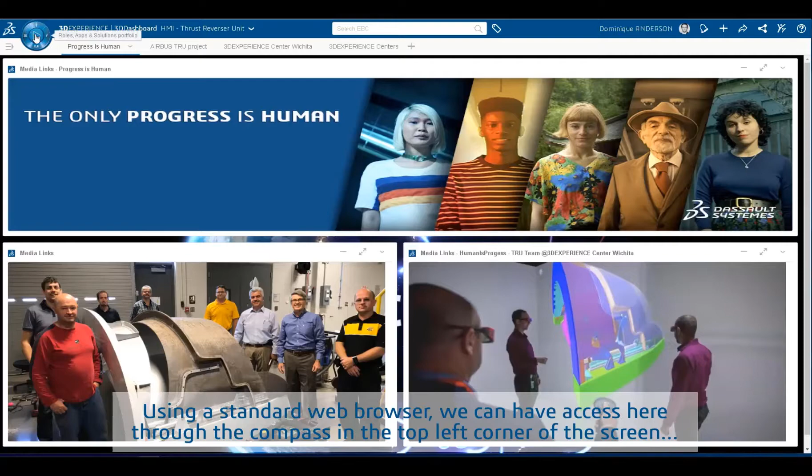Using a standard web browser, we have access here through the compass in the top left corner of the screen to the roles that are assigned to me, or for any individual in the company, and for all aspects of their business, from engineering to production, as you might know, but also including legal, general and administration, human resources, sales and marketing. For each role, there are a set of applications that are available. Those applications may be from Dassault Systèmes, from third-party software, or developed in-house.

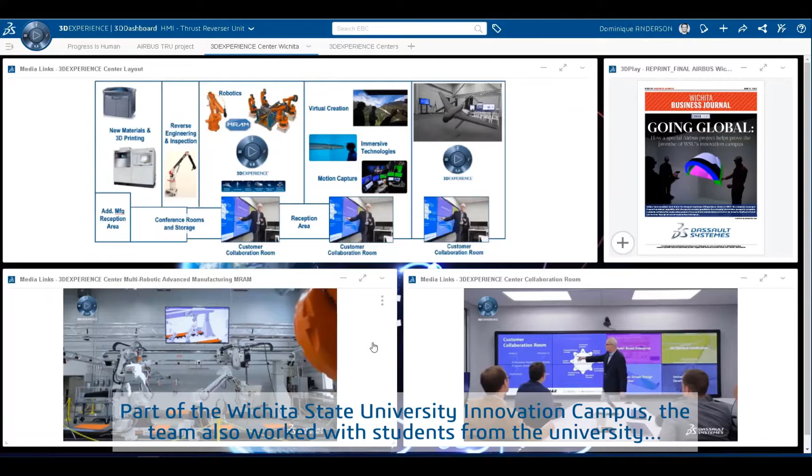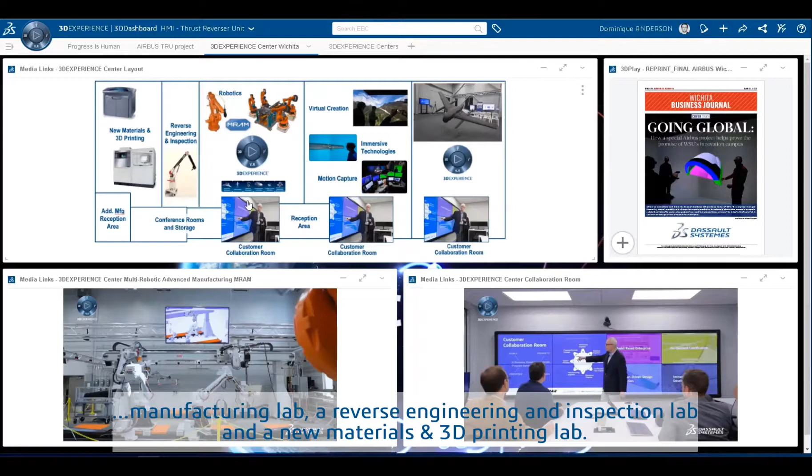They came together on the 3D Experience platform and in a unique facility called 3D Experience Center, located in Wichita, Kansas. Part of the Wichita State University Innovation Campus, the team also worked with students from the university, as well as with experts from the National Institute for Aviation Research, NIAR, to develop new working methods leveraging the various labs available, including the Immersive Technologies Lab, a multi-robotic advanced manufacturing lab, a reverse engineering and inspection lab, and a new materials and 3D printing lab. Extremely pragmatic in approach, these new methods are not idealizations, but can be taken back into your production environment.

The 3D Experience Centers are part of a global network we are building with universities, authorities, and industrial partners. As you see here, the Wichita Center is live. Centers in Seattle and Toulouse are work in progress. Various centers are also active in India and across Asia.

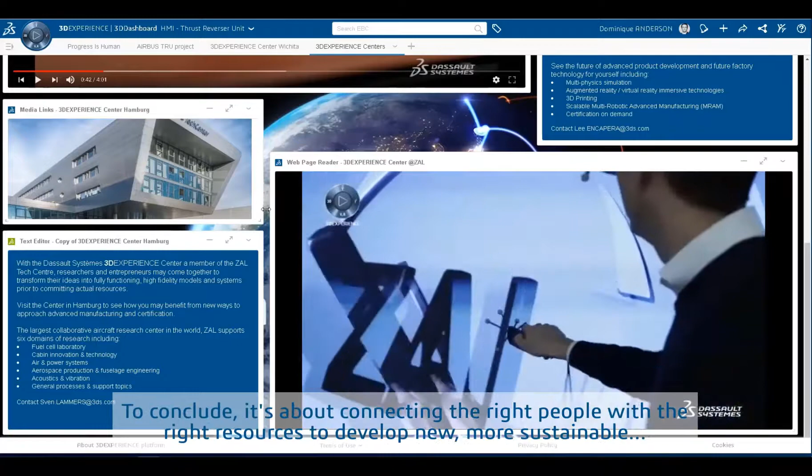To conclude, it's about connecting the right people with the right resources to develop new, more sustainable, and more resilient ways of working as we move forward together.

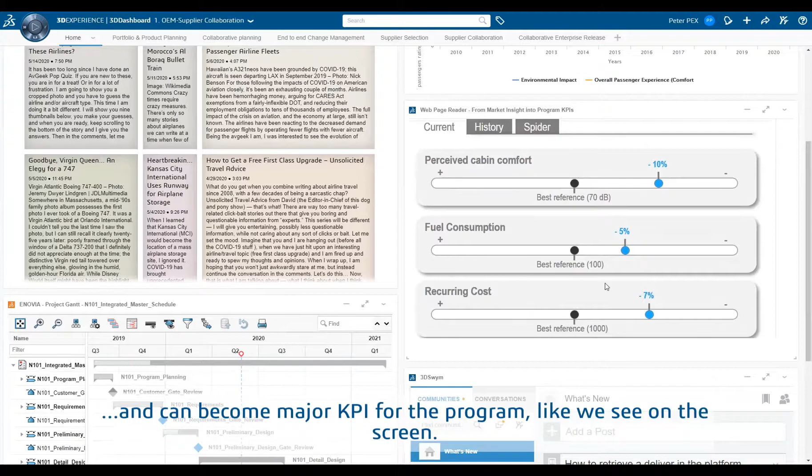Welcome to pod number 2, centered on OEM supplier collaboration. We start on OEM's side, where the OEM program director, Peter, logs into the platform and is welcomed by his own customized dashboard. Here, he can aggregate information from different sources, like RSS feeds or customer surveys. This particular survey tracks the criteria that the passengers consider important for air travel, and can become a major KPI for the program, like we see on the screen.

Speaking of program, here we have an integrated master schedule view with the collaboration tasks for the supplier. Likewise, we have a supplier network community where the OEM shares information in real time with the whole value network, fostering agile collaboration.

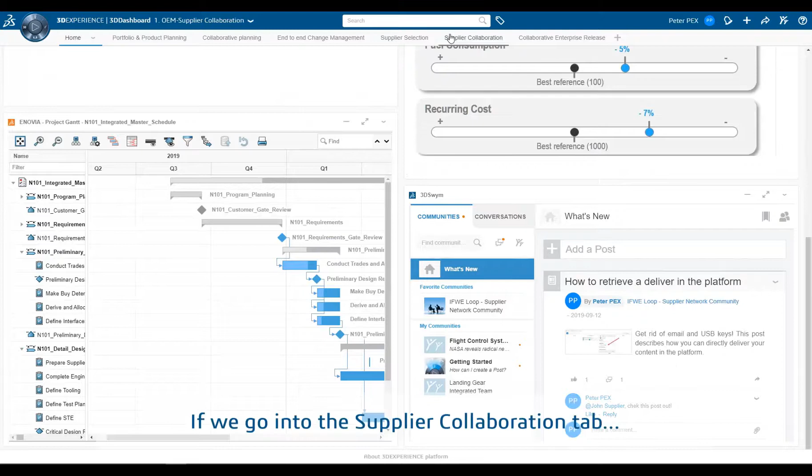If we now go into the Supplier Collaboration tab, we see that there is a dedicated project for the OEM supplier collaboration around the design and the manufacturing of the flap. Here, the OEM can define tasks that will be under the supplier's responsibility. By filtering the collaborative tasks by project, he can reveal the tasks that have been defined in the context of said project from an assignee, owner, or reviewer point of view. On any given task, he can assign people from his company or his value network to perform the work.

In addition to that, we also have the so-called bookmark spaces in the 3D Experience platform. These bookmark spaces act like secured folders in the database where the OEM reveals information for the supplier so that they can easily retrieve the data and work in a collaborative manner. Now the dashboard has been shared with the supplier.

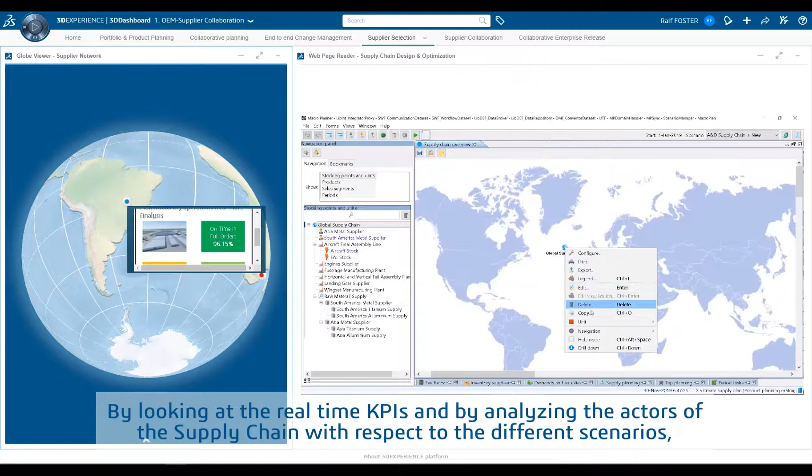We are now going to the head of supply chain and we see him log into the dashboard. In the Supplier Selection tab, he checks the status of the supply chain and envisions some alternatives or what-if scenarios. By looking at the real-time KPIs and by analyzing the different actors of the supply chain with respect to these different scenarios, he can optimize their behavior. Adding or removing suppliers is possible in order to meet business objectives such as desired production rate, capacity, or quality, for example.

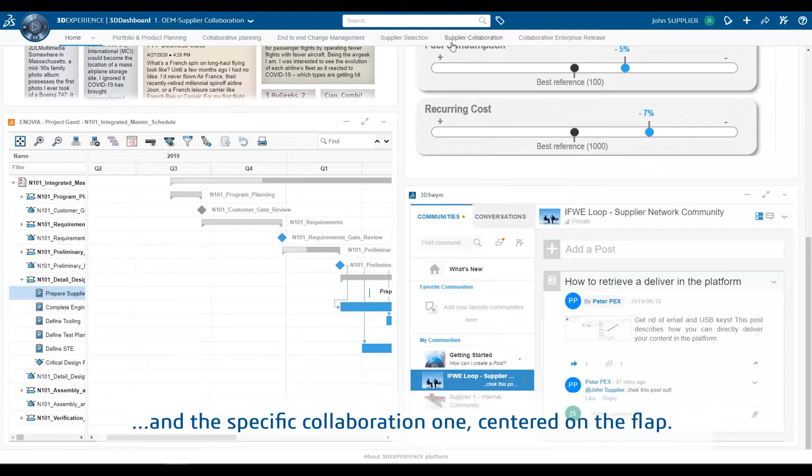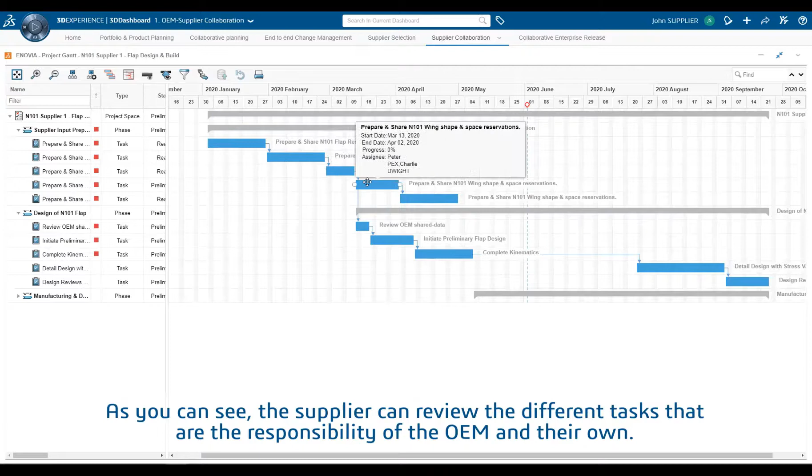Now, on supplier's side, the supplier program manager has now access to the dashboard. He can view the information that the OEM has decided to share with him. In this case, 2 projects have been shared: the overall master program project and the specific collaboration one, centered on the flap. This way, the supplier sees their own tasks, the related data along with the expected deliverables. As you can see, the supplier can review the different tasks that are the responsibility of the OEM and their own. Many tasks have been assigned to the supplier, so he can start working on them right now.

The supplier has also access to the bookmark spaces that the OEM has decided to share with them. They can review the data that has been revealed by the OEM. In this case, we can see the space allocation mockups that are going to drive the design of the flap, together with the equipment allocations. The master 3D geometries are also reviewed.

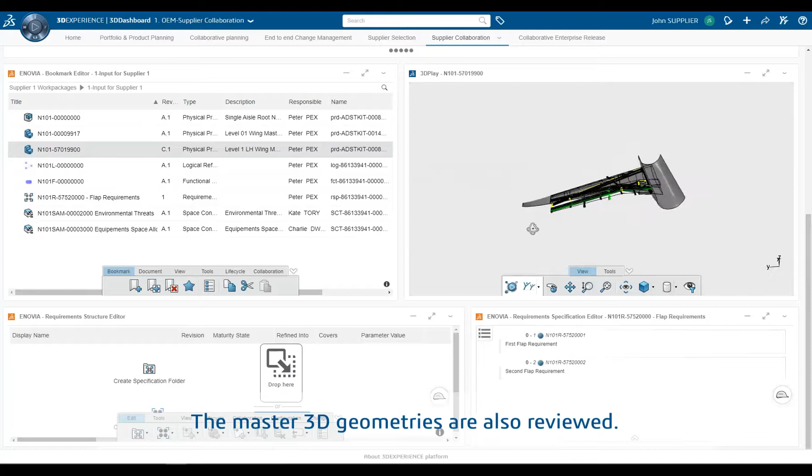It is worth noting that we are checking everything in a web-based dashboard. So all you need is a web browser to access, visualize, and navigate through the data that the OEM is sharing. They are quickly reviewing the wing master geometries to identify the interfaces that are needed for the design. Besides 3D data, the OEM can also share specific requirements for the supplier so that they can take them into account when designing the product.

To finish this part of the demonstration, we can take a look at the communities that the OEM has created for the supplier. They can check the information therein, and they can share it with the rest of the team.

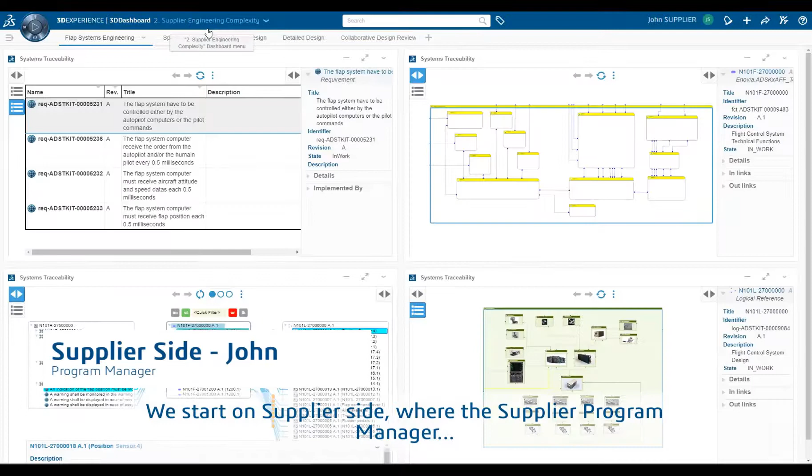Welcome to pod number 3, centered on collaborative multidiscipline engineering. We start on the supplier's side, where the supplier program manager looks at the detailed systems engineering data that the OEM has shared with him. He can take a look at the different requirements set by the OEM for the flap assembly under his responsibility, with full connection to the functional views of it and the logical view beneath it.

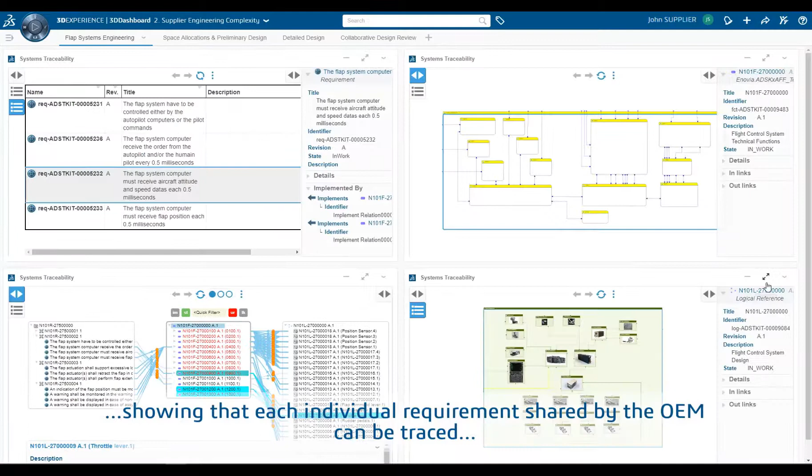Here, we can see a traceability view from requirements through functions all the way to the logical breakdown of the flap, showing that each individual requirement shared by the OEM can be traced to the logical component that is supposed to implement it. The supplier can take a closer look at the 3D data coming from the OEM, whether it takes the form of space allocation mockups defining the main equipment volumes for the aircraft, or master geometries.

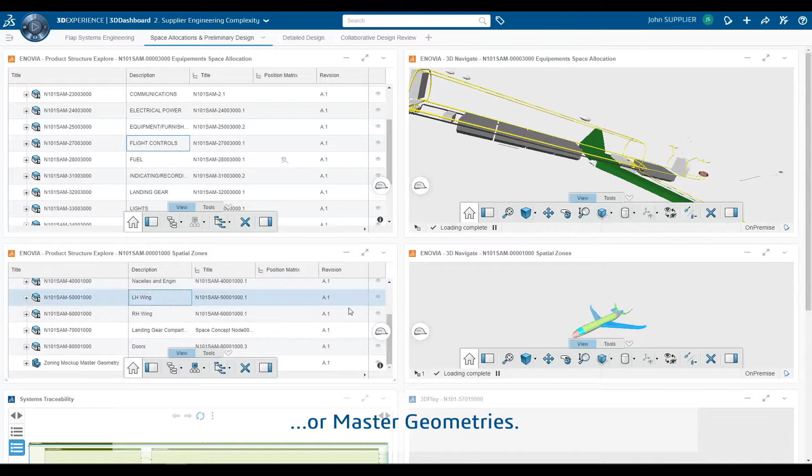Here, we see another systems engineering view, which places the flap system in the larger scope of the full aircraft, within the full systems architecture. This is what we call an aircraft-level logical breakdown. For the master geometries of the aircraft, the OEM shares the main interfaces that the supplier will need to respect. After checking all of this information, the supplier can start the detailed design.

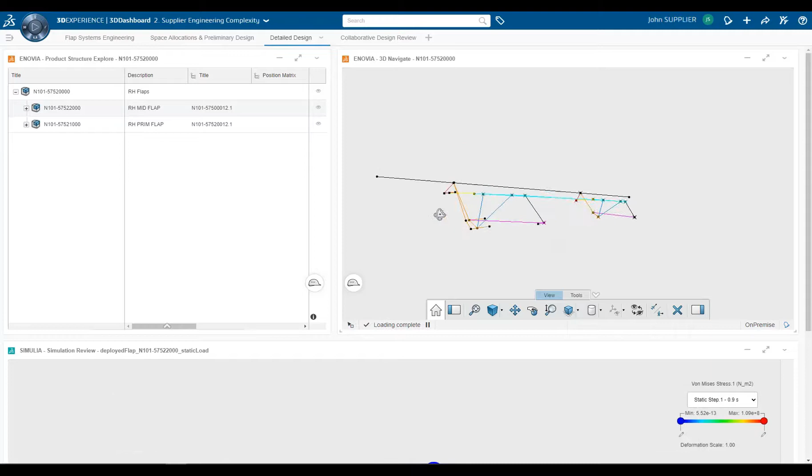Here we see that, as time progresses, more and more mechanical components designed by the supplier and linked to the OEM's requirements come to life. When design reaches a sufficient maturity, the design review can start. In this case, we can see that there's an easy access to the full engineering bill of materials, in other words, the full engineering definition of the product directly on the web-based dashboard.

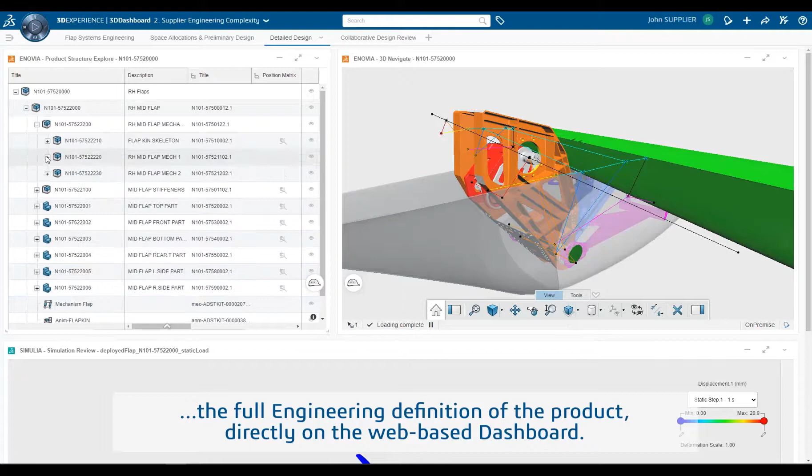Besides reviewing only 3D data, inside this web-based environment, the stress analyses performed by the supplier can be accessed. This allows them to check that the design about to be produced actually corresponds to and satisfies the OEM's requirements. We can see the displacements, the von Mises stresses in this static simulation, and for the moment, everything seems to be fine and compliant with the specifications.

After completing this internal review, the supplier will be able to signal it to the OEM directly on the 3D Experience platform using collaborative tasks. On OEM's side, the joint design review of the flap assembly is carried out live using the 3D review capabilities enabled by the 3D Experience platform. Again, actions and progress are tracked using collaborative tasks.

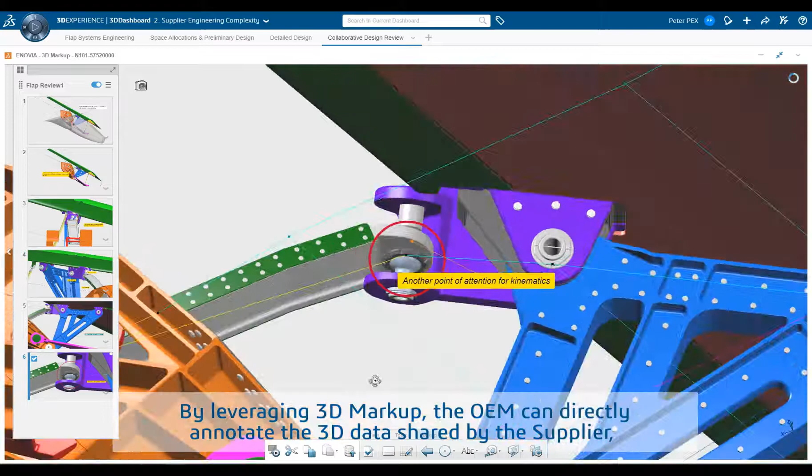By leveraging 3D markup, the OEM can directly annotate the 3D data shared by the supplier and use it as a vector of communication. This is model-based collaborative engineering. The design review is carried out without a single document in a web-based dashboard.

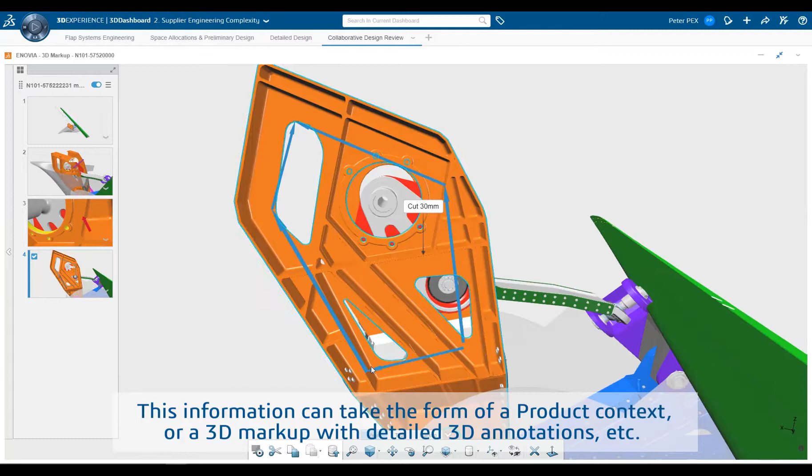After performing the collaborative design review, the OEM raises some minor issues, which will be addressed by formal change actions. These issues are tightly connected to the 3D definition of the product and contain all the relevant information for the supplier to treat them. This information can take the form of a product context, a 3D markup with detailed annotations, etc. As we said earlier, the resolution of these issues will be tracked in the 3D Experience platform using a formal change process that includes both the supplier and the OEM.

Welcome to pod number 4, centered on supplier design for manufacturing. After the design on supplier's side reaches a sufficient level of maturity, the manufacturing planning can start. The engineering definition of the product, that is, the engineering bill of materials, is restructured and consumed with full traceability and accountability into the manufacturing bill of materials, the MBOM. Consumption is very intuitive, and it can be checked with BI Essentials.

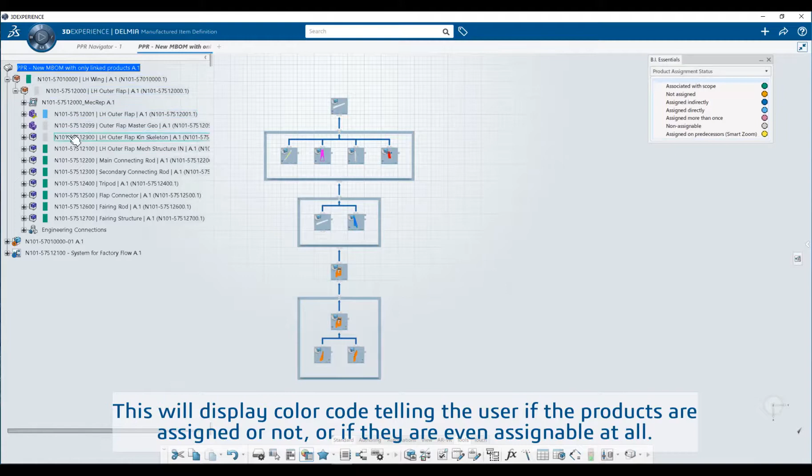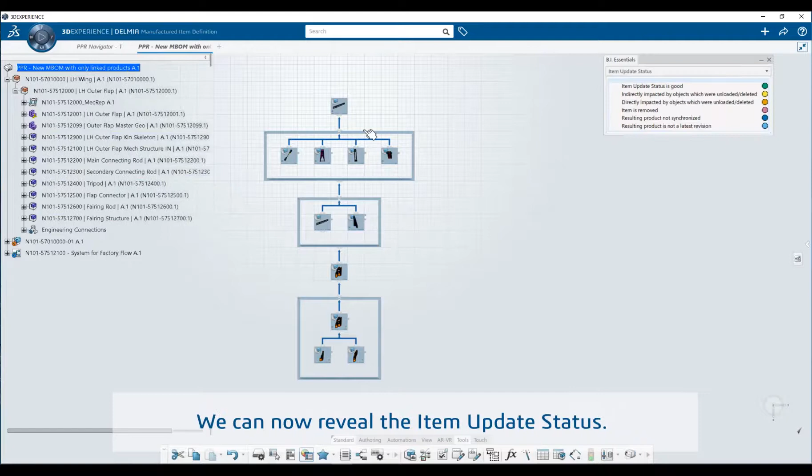This will display a color code telling the user if the products are assigned or not, or if they are even assignable at all. This is what we see here. Some products are assigned directly, and some that are, for example, structuring elements of the EBOM are not. We can now reveal the item update status. It tells us if the MBOM is up to date with respect to any engineering changes on EBOM side.

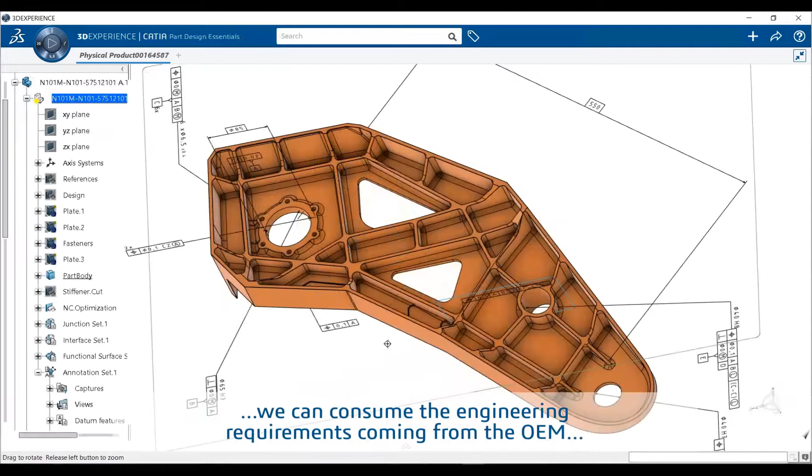After defining all the intermediary models, from raw material to finished part, we can consume the engineering requirements coming from the OEM or coming from the supplier's own manufacturing engineering department. Each requirement can be assigned to the step of the process where it is relevant. This is paperless model-based engineering. It is what we see here. Once the requirements have been allocated to the MBOM, they can be dispatched to the different steps in the process planning to be used later for the NC machine programming.

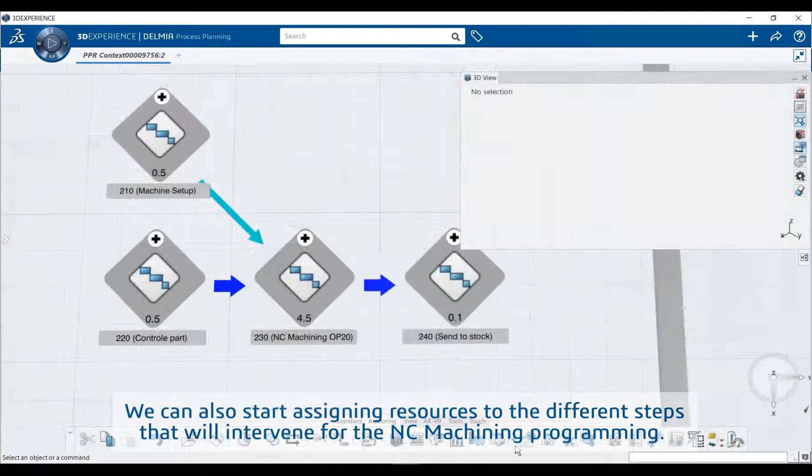We can also start assigning resources to the different steps that will intervene for the NC machining programming. This will complete the programming context, as we will see in the following steps. For now, let's quickly jump to factory flow simulation.

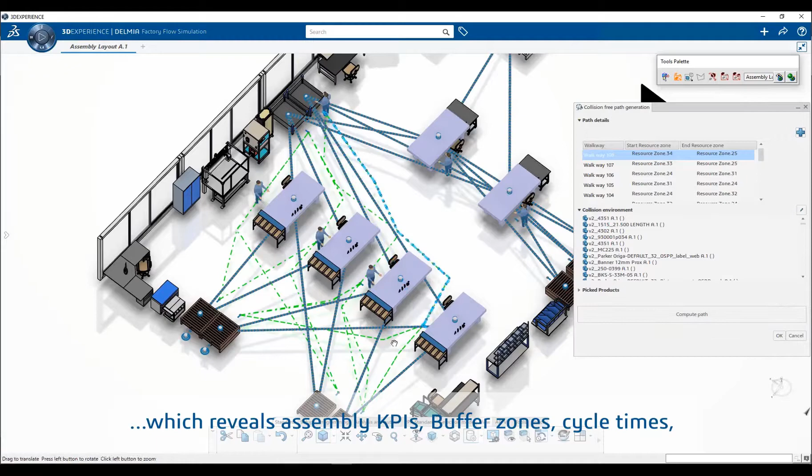After defining the plant layout, we investigate the capabilities of assembly rate using factory flow simulation. It reveals assembly KPIs, buffer zones, cycle times, and allows us to verify that our production planning is on target and that it can satisfy the desired rate expected by the OEM.

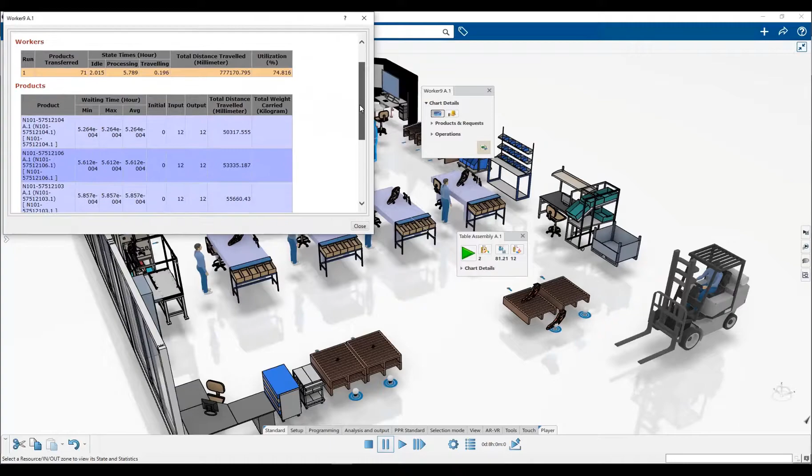To finish this part, the manufacturing engineer on supplier side logs into the 3DDashboard and uses a collaborative task to signal that they have delivered both the MBOM and the routings for assembly and for NC machining to the OEM for review. This is done for all of the expected deliverables.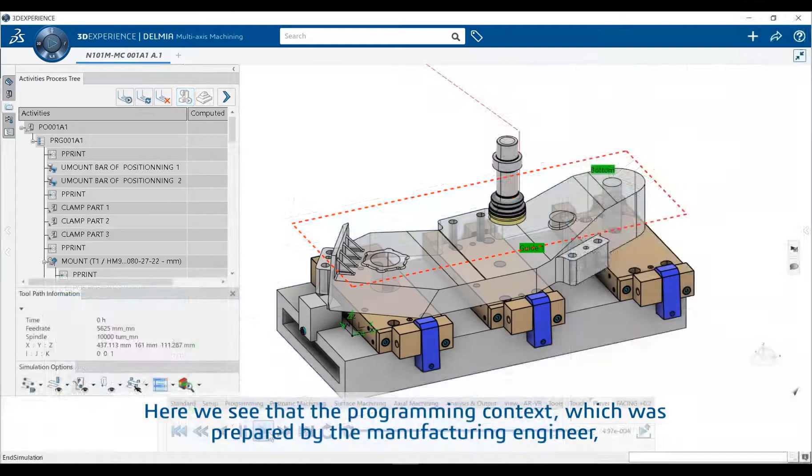After completing this factory layout planning and flow simulation, let's jump back into the NC programming. Here we see that the programming context, which was prepared by the manufacturing engineer, is used by the NC programmer to program the virtual twin of the actual machines that are available on the shop floor and to simulate the material removing process from raw material through semi-finished part all the way to the last finishing operations.

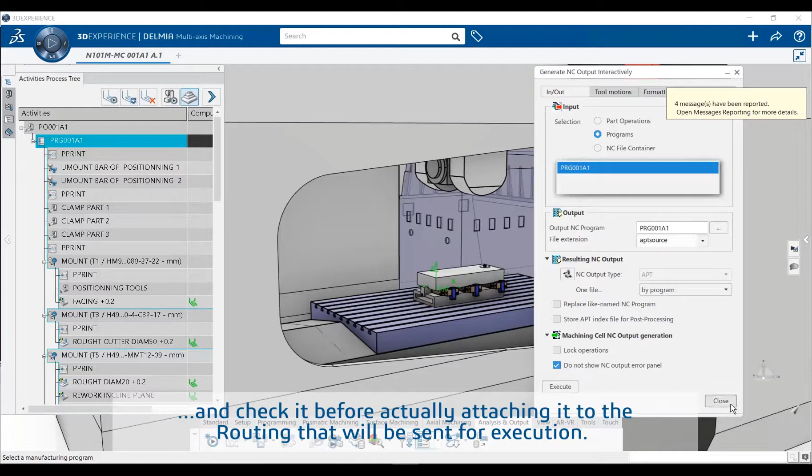Once the programming has been simulated and validated, we can generate the standard machine code and check it before actually attaching it to the routing that will be sent for execution. Here we see that the program is available and we can check it one last time, and then it will be attached to the resources before being sent for execution.

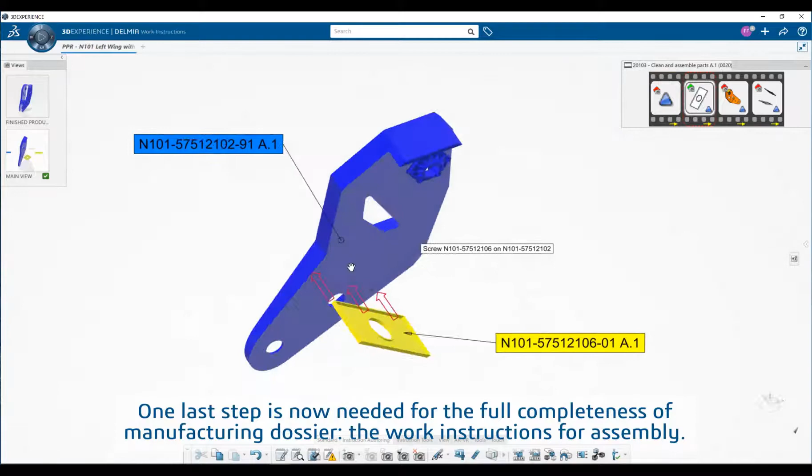One last step is now needed for the full completeness of the manufacturing dossier, which is the work instructions for assembly. So, after finishing the MBOM and the process plans, we document them with intuitive model-based work instructions to make sure that our assembly operators get first-time quality.

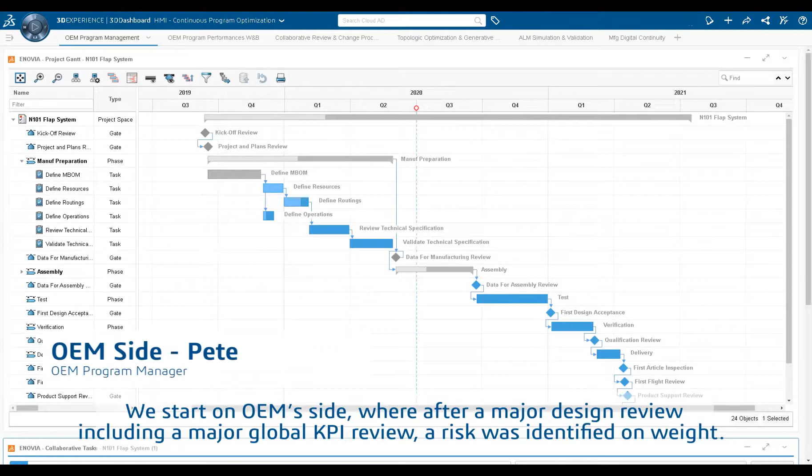Welcome to pod number 5, centered on continuous program optimization. We start on OEM's side, where after a major design review, including a major global KPI review, a risk was identified on weight. The program manager takes it upon himself to investigate the weight, to review it, and to then use all the capabilities offered by the 3D Experience platform to assess the weight and review the weight objectives. The weight analyses can begin.

After bringing the weight of the flap assembly into the session, he notices that the weight is on target. However, in order to mitigate the risks that have been identified, the target value of the weight for the assembly, under the responsibility of the supplier, needs to be modified. After this modification, the current design of the supplier is over target.

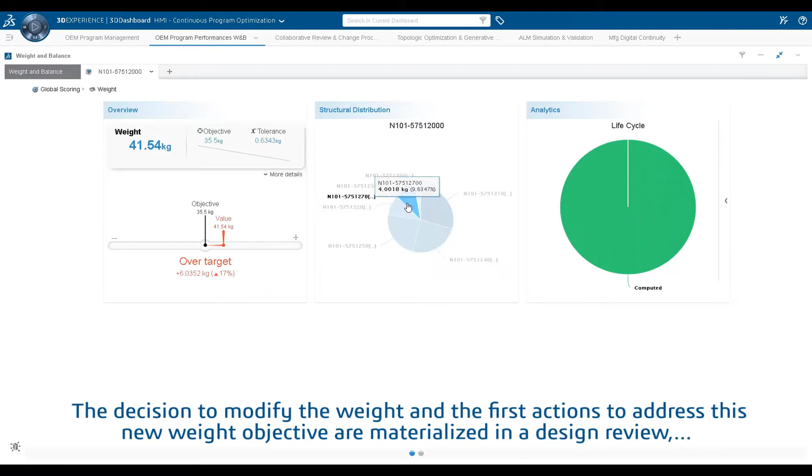The decision to modify the weight and the first actions to address the new weight objective are materialized in a design review, which will result in a change action for the supplier requesting a new part or a new version of the assembly where the weight has been reduced. During the design review, a good candidate for lightweighting using additive manufacturing is identified and shared. Then, the supplier can start working on this issue.

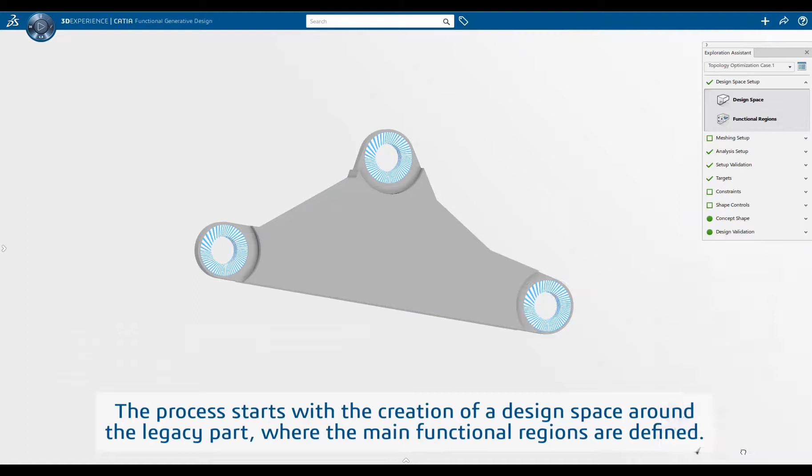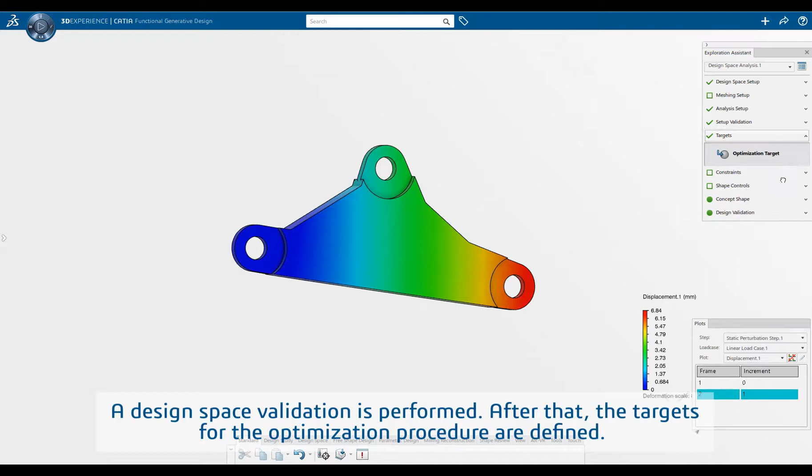Design for additive manufacturing uses the generative design capabilities offered by the 3D Experience platform. The process starts with the creation of a design space around the legacy part, where the main functional regions are defined. The in-operation loads shared by the OEM are applied to said functional regions in order to drive the topology optimization process. A design space validation using those loads is performed. After that, the targets for the optimization procedure are defined. Maximizing the mechanical stiffness of the part while minimizing the weight is the goal here.

The functional generative design solution automatically proposes some organic-looking shapes that are perfectly suited for additive manufacturing. The validation of the new part confirms that it performs even better than the legacy machined part. A more in-depth comparison bringing up different KPIs can be done, and all aspects such as weight, mechanical properties, displacement, and maximum stress, and so forth, show that the part optimized for additive manufacturing is superior to the legacy one.

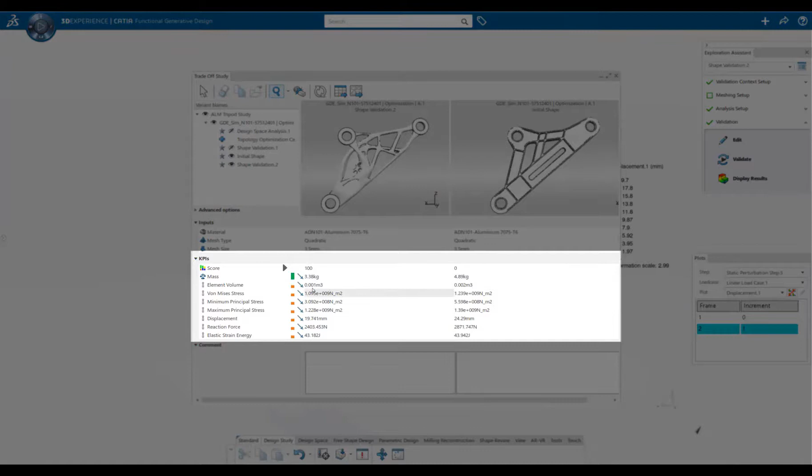Once the design is validated against the in-operation loads, the additive manufacturing process planning can begin. By leveraging digital continuity within the 3D Experience platform, the new part coming straight from design is used to start preparing the additive manufacturing process. The engineer starts by defining an optimized print orientation, either automatically or manually, on a virtual build tray. Then, the optimal nesting and support structures for the part are created, based on geometric and material properties criteria.

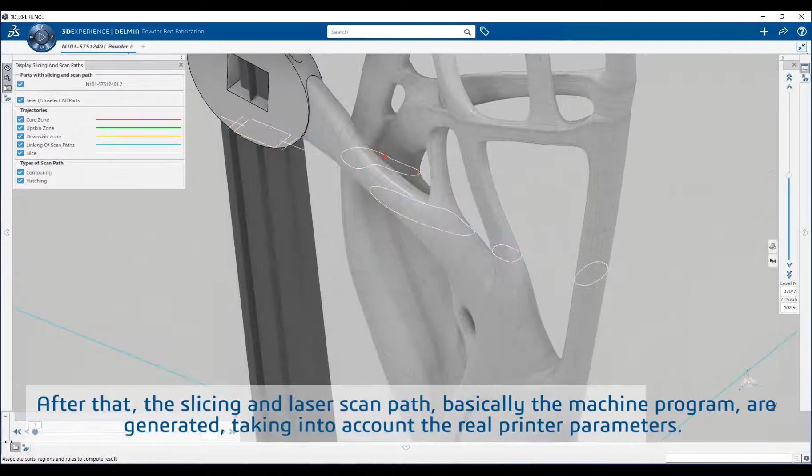After that, the slicing and laser scan path, so basically the machine program, are generated, taking into account the real parameters of the actual printer. Finally, some quality analyses and a multi-physics simulation of the virtual print process are performed in order to validate the program. This increases the confidence that the parts that are going to be printed correspond to the desired specifications and requirements.

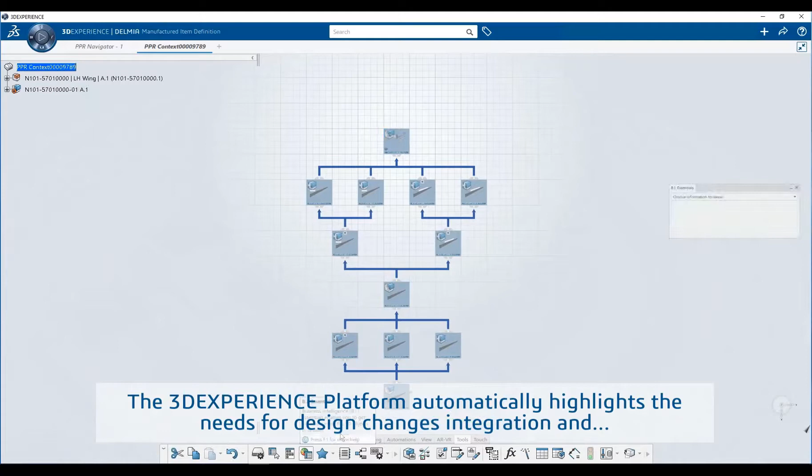After validating the virtual print, the legacy part is replaced by its new additive manufacturing version on supplier side. All of the assembly manufacturing planning is updated to take into account this change. The 3D Experience platform automatically highlights the need for design changes integration and quickly enables the user to flow down changes from engineering to manufacturing planning. Now, all of the manufacturing planning for assembly also includes the new additive manufacturing part.

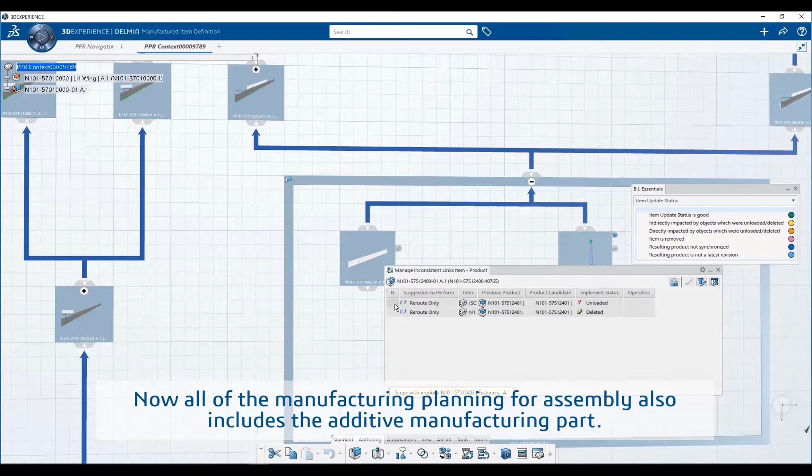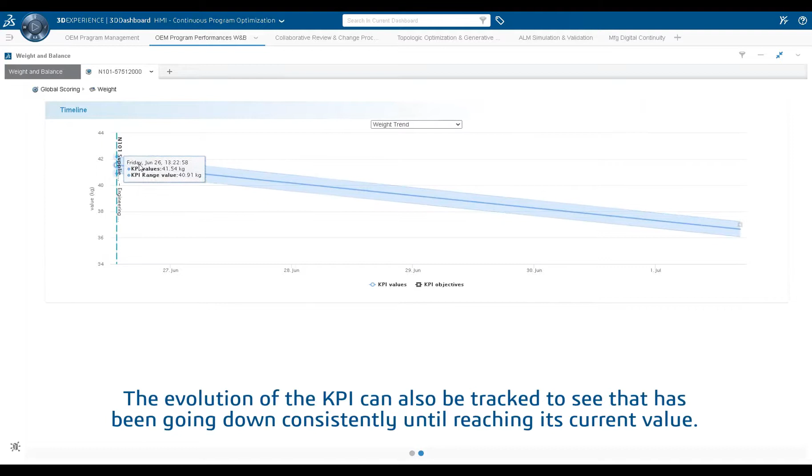Back on OEM side, we can now see that the assembly, after this modification, is well on target, and all the risks for the program have been mitigated. The evolution of the KPI can also be tracked to see that it has been going down consistently until reaching its current value. As always, these activities are tracked using collaborative tasks.

Welcome to pod number 6, centered on manufacturing operations excellence. We start on Apriso side, where a production operator called Sylvie logs into her Apriso portal. Because she is responsible for the additive manufacturing facility, she has a real-time monitoring view on the whole machine park under her responsibility. One of the 3D printers seems to be presenting a problem, so she zooms in to investigate.

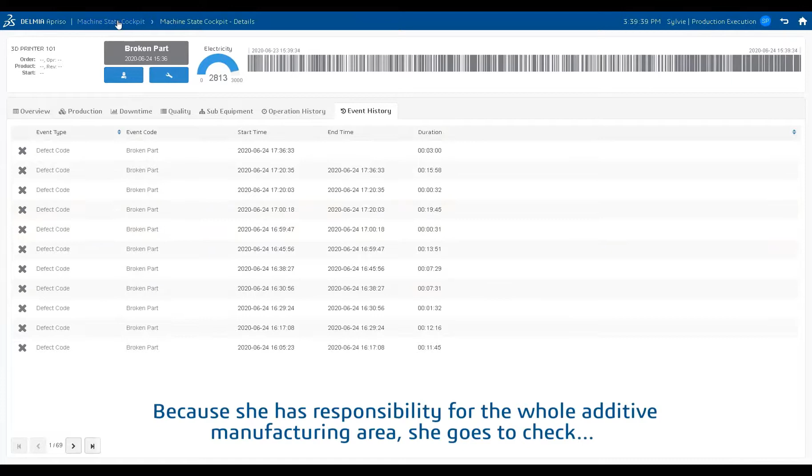Quite a few defects appear on the machine in their recent history, so the production operator decides to raise an alert for the maintenance department, signaling that there are quality defects in this particular machine. Because she has the responsibility for the whole additive manufacturing area, she goes to check one of the machines that are still running to verify that the production is up to schedule with the desired quality. Here we see that the targets are mostly met with regards to production output and quality is improving.

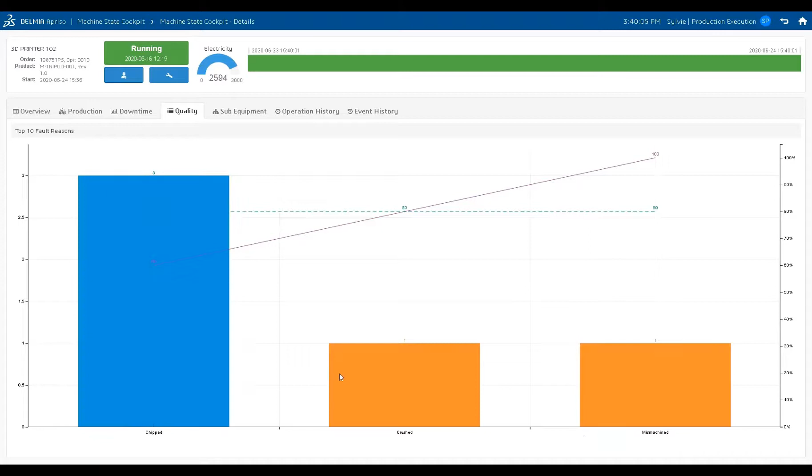After checking the indicators that she needed, she can take a look at the work order currently being executed on the machine, and she can signal its completion when it is appropriate to do so. Finally, Sylvie, our production operator, digitally validates the production sign-off.

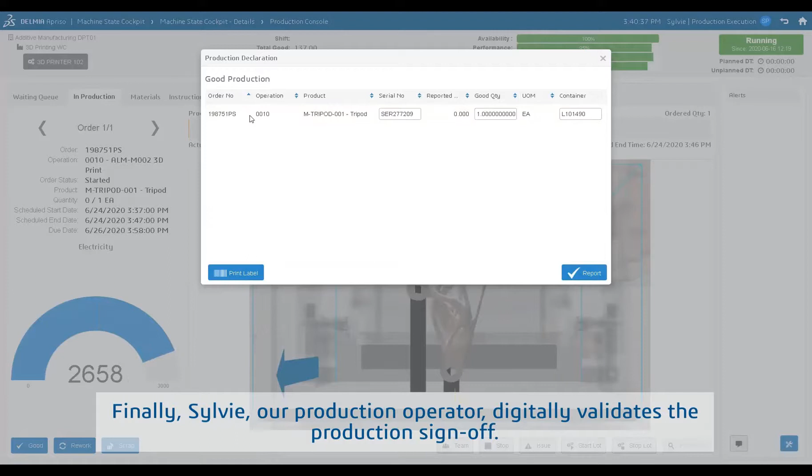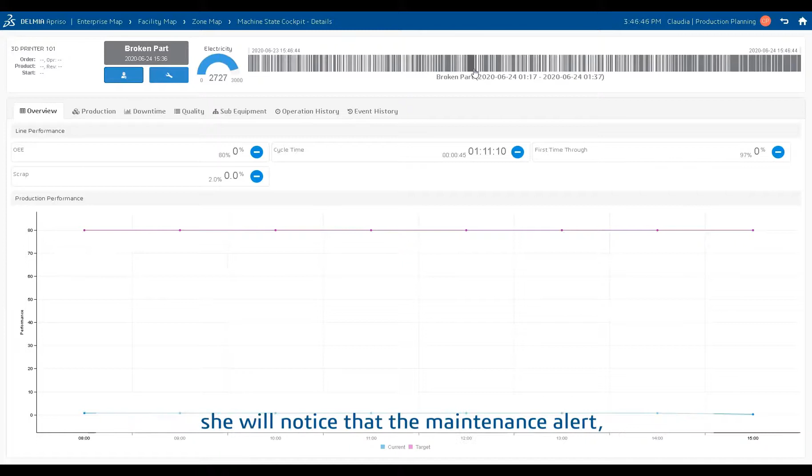If we now go to the production supervisor and scheduler, Claudia, we see that she goes to the aerospace and defense facility and looks at the additive manufacturing area. She realizes that there is a 3D printer that is down and that it is causing some problems, so she will have to take an action. If she goes into her home screen and then into her alert list, she will notice that a maintenance alert created by the production operator Sylvie is present.

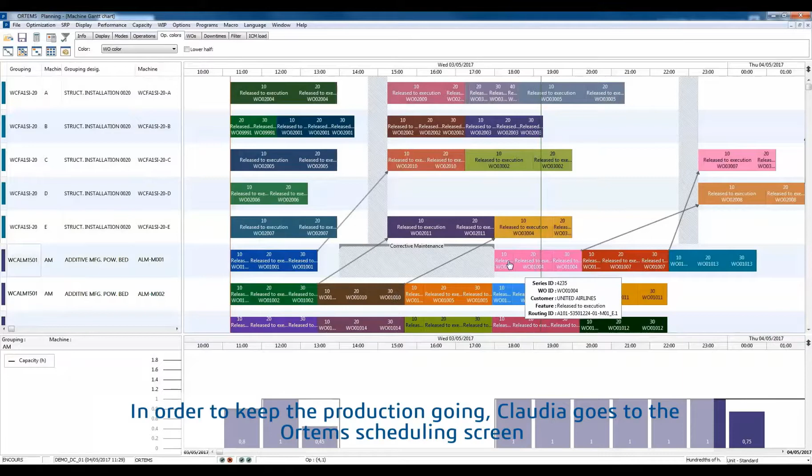She decides to take it with a high severity because of the nature of the issue, and she creates a corrective maintenance order, effectively putting the machine offline. In order to keep the production going, Claudia goes to the Ortems scheduling screen and starts changing the planning of the production around the unavailability window of the machine. She does so manually at first, and then she switches to an automatic schedule optimization made by the software in order to improve the planning and secure the production rate.

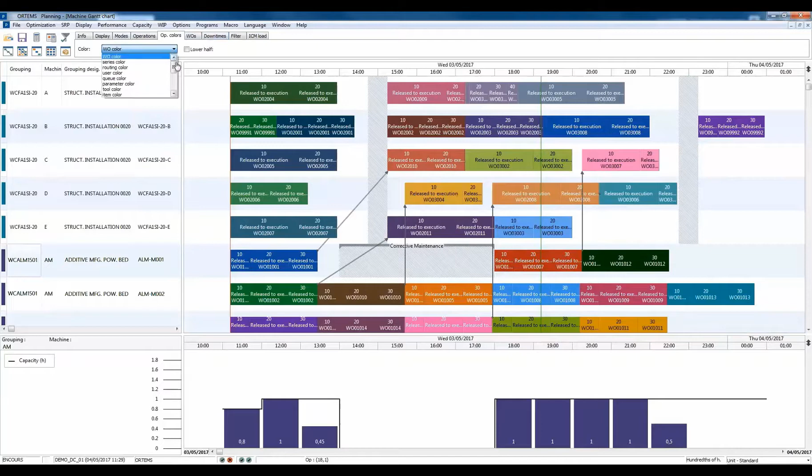She can compare the different scenarios that she has envisioned in order to choose the best one with respect to specific criteria.

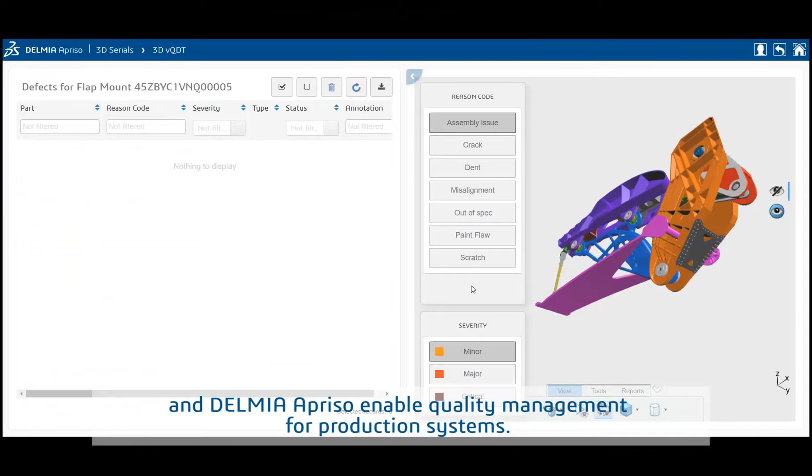For the last part of the video, we're going to see how the 3DEXPERIENCE platform and DELMIA Apriso enable quality management for production systems. In this case, we see that one of the serialized units of the manufactured flap assembly is selected, and quality defects are signaled directly on the 3D model of the product. These defects have different severities and different reason codes. Once they are solved, for example in this instance during production, they are closed.

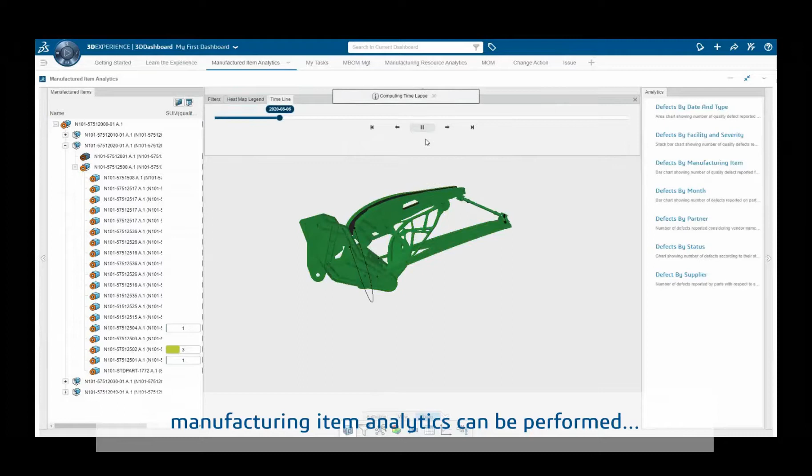As time goes by, and as different defects are signaled on different serialized units of the same product, manufactured items analytics can be performed in order to reveal trends in the global manufacturing operations. Manufactured items analytics connects the dots between production operations and engineering by revealing trends that can result in potential product improvements. We see how the defects are classified according to different categories, such as type and date, and how an intuitive color code reveals the amount of defects per part of the flap assembly.

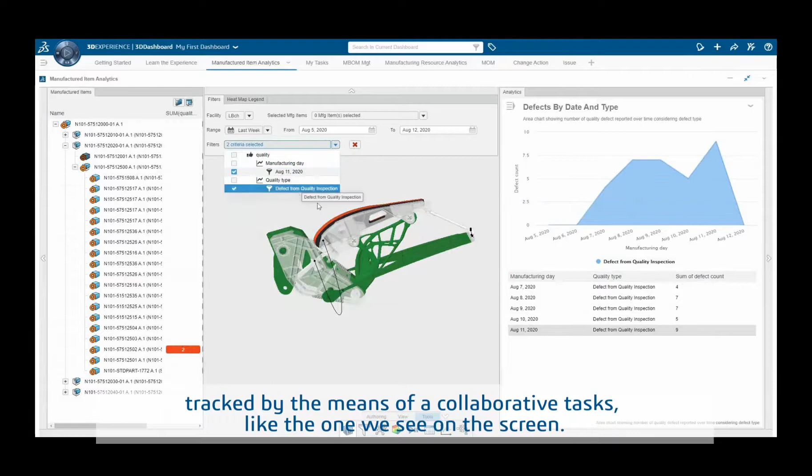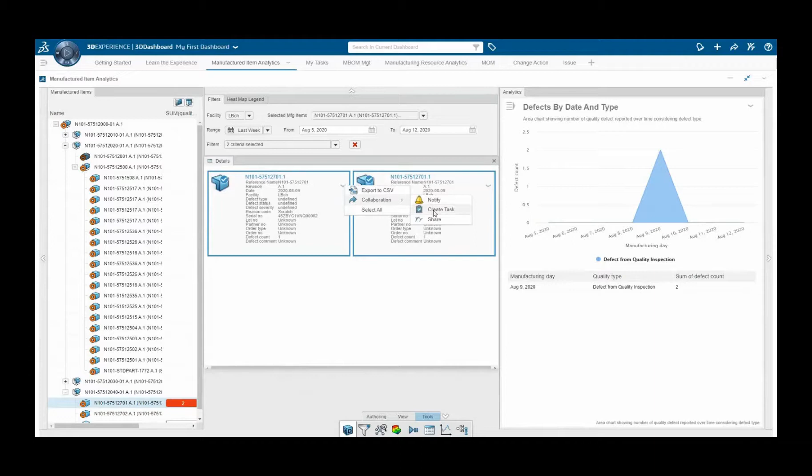These defects can initiate an investigation procedure, tracked by the means of collaborative tasks, like the one we see on the screen. Here, the head of the quality department is directly assigned on a task with the relevant information to investigate the increase of quality defects reported against a particular part. This procedure may result in a formal engineering change to address the issue. All of the necessary information is directly shared from the 3DEXPERIENCE platform and contained inside the collaborative task.

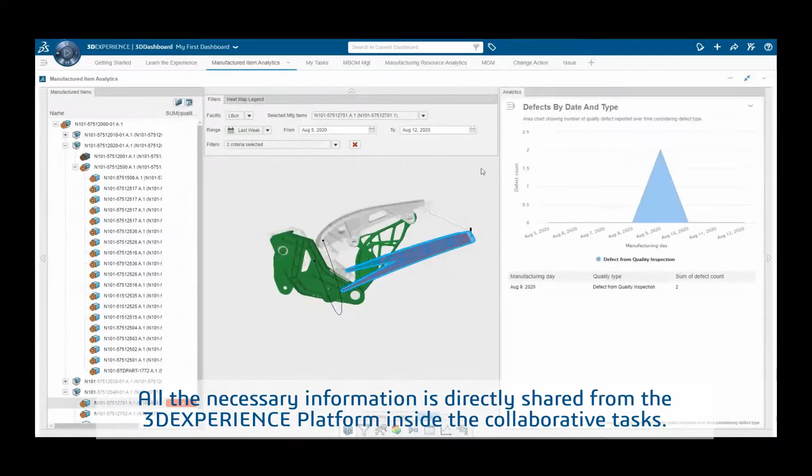We can also foster another mode of collaboration involving a broader audience through the 3DEXPERIENCE platform communities. This is what we're seeing on the screen. Now we can see part of the analysis that is performed on the defects. What we're seeing is a decomposition graph of the different defects for each part with the reason codes, severities, and so on and so forth. This will guide the analysis of the issues.

Now we are with the responsible for production quality, who's receiving the different tasks that he acknowledges and starts working on a resolution workflow to address them.

Welcome to pod number 7, centered on 360 operations excellence.

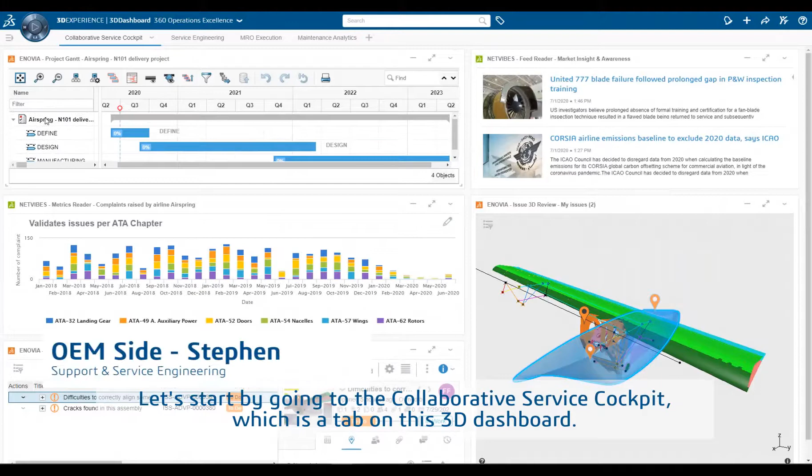Let's start by going to the Collaborative Service Cockpit, which is a tab on this 3D dashboard. Here, we have a NetVibes feed reader to gain market insight and awareness. We also have a metrics reader that shows issues airlines have raised and that have been validated by the OEM, and here they are classified by ATA chapter. Notice the amount of complaints fluctuates with and matches the air travel trends.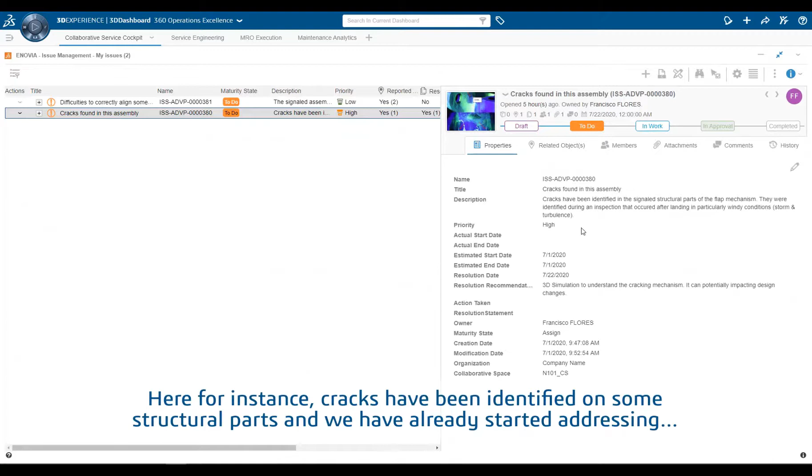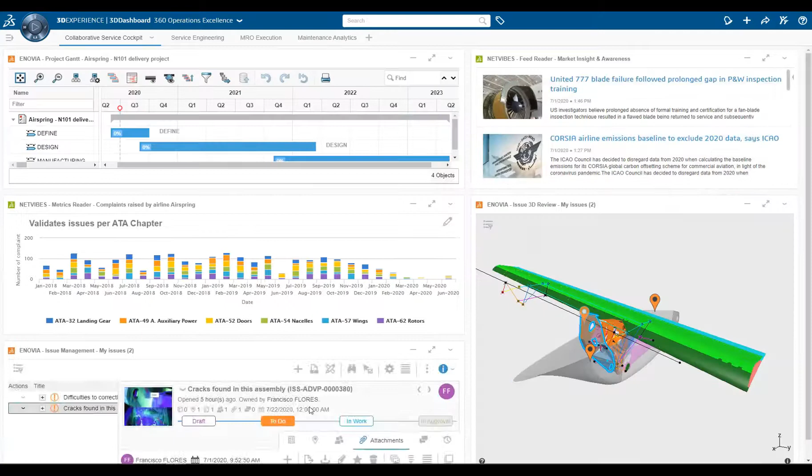In addition to that, we also have a 3D issue widget with some issues reported directly against the 3D geometry. Here, for instance, cracks have been identified on some structural parts, and we have already started addressing the related issues by using a numerical simulation. Each issue is very tightly connected to the 3D models and aggregates all the information of the resolution workflow.

Let's now go to the Service Engineering tab. We can easily see that the Service Engineering department has full access to the engineering definition of the product, the EBOM. The service engineer can navigate through it, and using the full model-based engineering definition of the product, they can define the Service Bill of Materials, SBOM. Here, we are highlighting the consumption and the assignment status from the EBOM to the SBOM. It shows which elements of the EBOM have already been consumed into the SBOM with an intuitive color code.

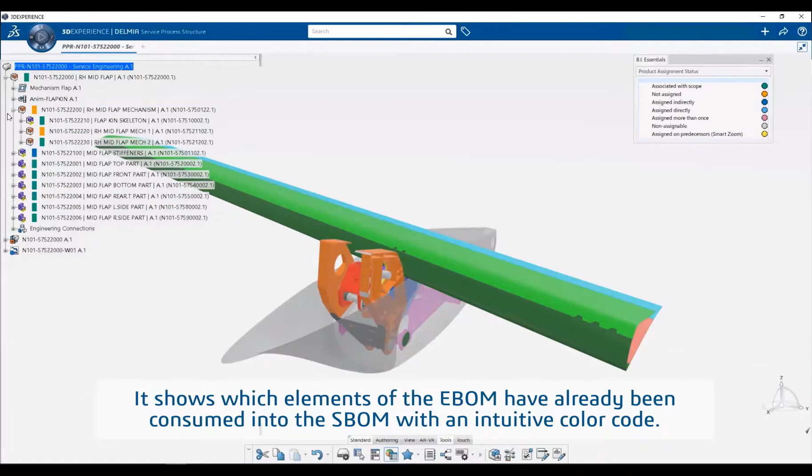So now we're going to bring up the PPR spreadsheet editor, which presents the EBOM, the SBOM, and the maintenance tasks in a tabular view. Notice that the SBOM items, which are linked to the EBOM, have service-specific attributes that are the responsibility of the service engineering team. If we go through the maintenance tasks, several of them have been defined to cover the main aspects of the flap assembly inspection.

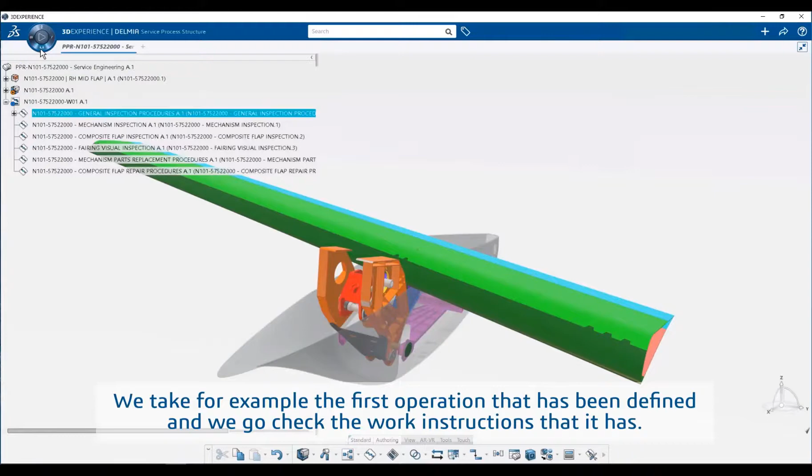We take, for example, the first operation that has been defined, and we go check the work instructions that it has. After reviewing the product in 3D, we activate the different views for the maintenance instruction. Here, we can see an exploded view of the flap assembly, as well as some extra views defined for the other inspection procedures. Notice that the other operations have also a main view. These are all inspection operations.

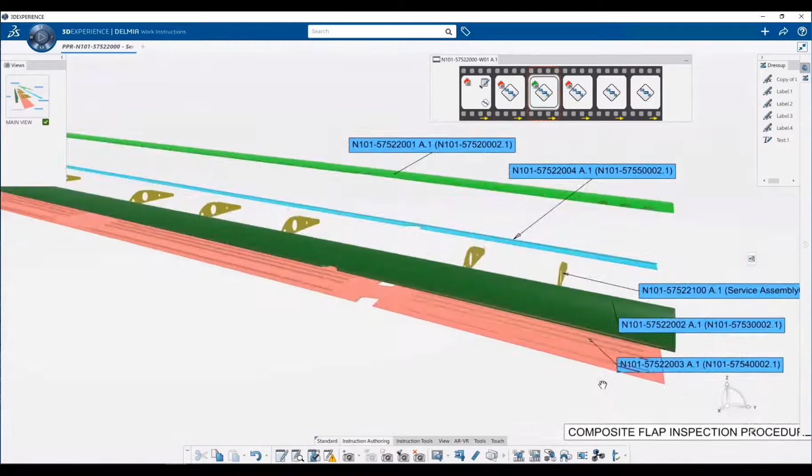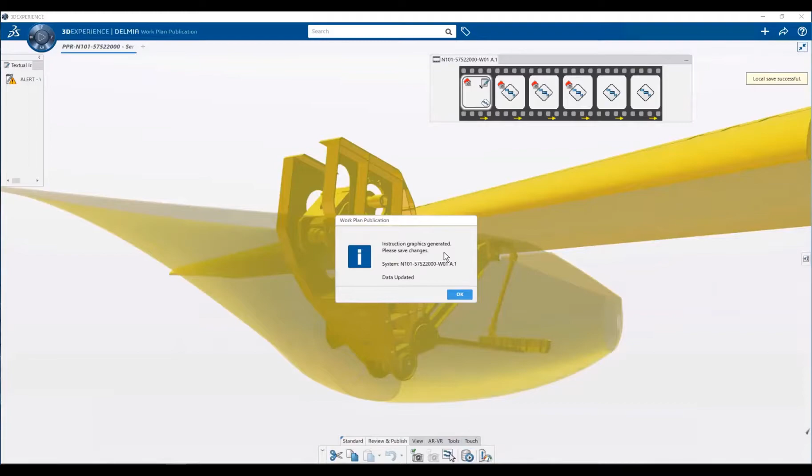After reviewing the different operations and the views that they contain, we decide to go forward with the work plan publication. We publish the work instructions as they are going to be viewed by maintenance operators using DELMIA Apriso. Now, we go back again into the dashboard to the MRO Execution tab. We can see the virtual twin of the MRO hangar with our aircraft inside.

After searching for the maintenance work instructions in the 3D Workbook widget, we have access yet again to the 3D model of the flap assembly, along with the work instructions that were defined earlier by service engineering. We have a view of both the 3D model and the 3D work instructions. They are accessible on any web browser through a 3D dashboard with the 3D Workbook application.

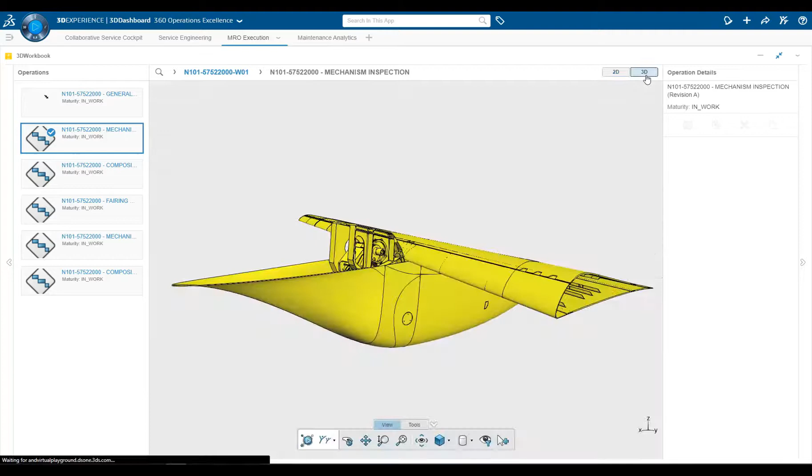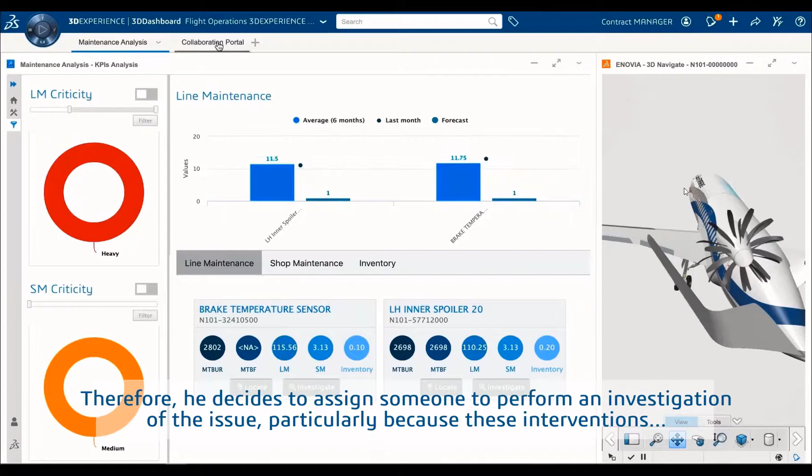Let's now go through the last part of the demo, the maintenance analytics. We start by playing the role of a contract manager who notices that there has been a high number of line maintenance interventions of high severity over the past few months. He therefore decides to assign someone to perform an investigation of this issue, particularly because these interventions have become rather frequent, much more than the predictive analyses of maintenance made them originally think.

After receiving the collaborative task requesting an analysis to be performed, the technical specialist goes to the maintenance analysis widget and starts performing the investigation. There is a very strong associativity between the issues that have been raised and the 3D design, as we can see in the screen. There is also a large amount of information coming from documents or older sources that has been aggregated by Exalead.

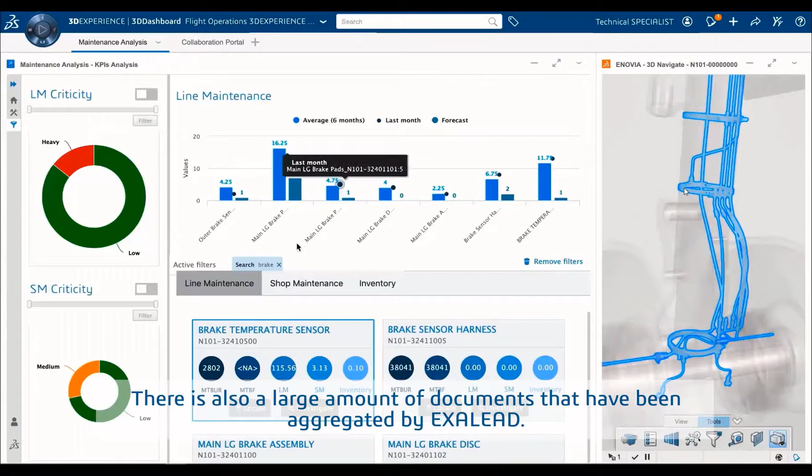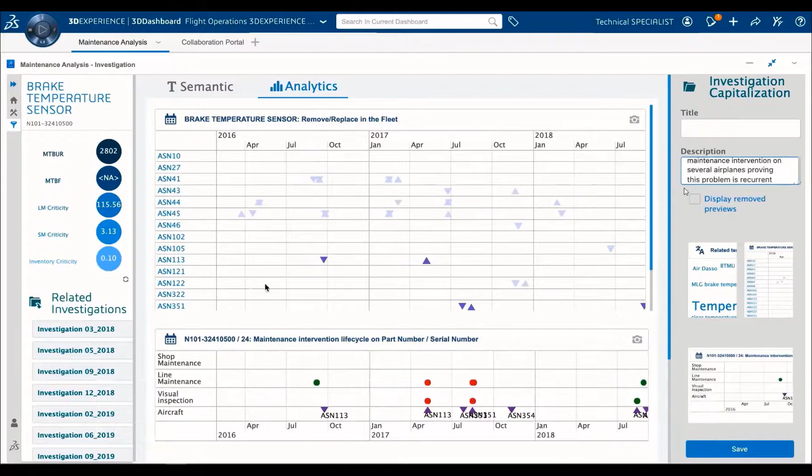To continue, the technical specialist starts his investigation by taking a look at the remove or replace operations involving this particular temperature sensor in the whole fleet. He cross-checks the data with data coming from sensors or flight data, and he has come to understand the root cause of this frequent issue. After completing his investigation, he saves a report that he can share in the collaborative tasks explaining his findings.

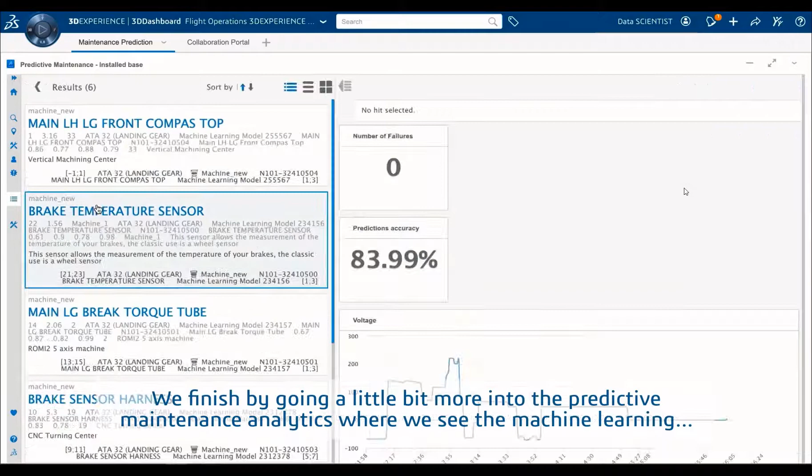We finish by going a little bit more into the predictive maintenance analytics, where we see the machine learning models that have been built to predict the number of failures and the time when maintenance is going to be needed. These machine learning models are enriched using the big data capabilities that the 3D Experience platform offers.